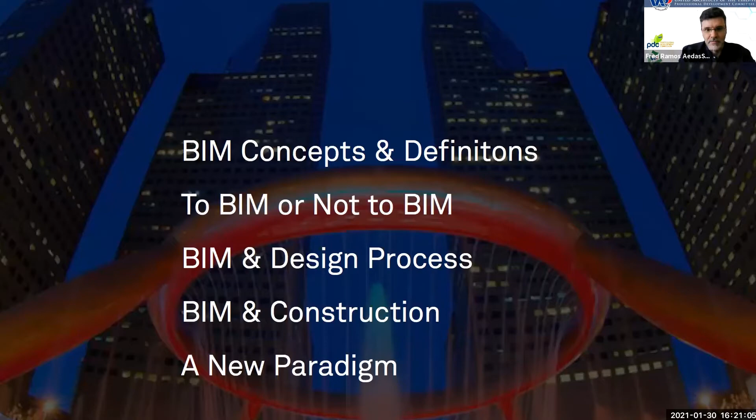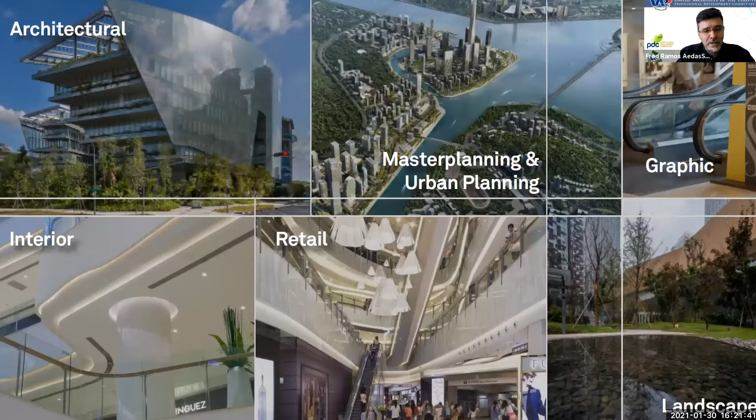Aedas as a company is built on this belief that great designs can only exist if you truly understand deeply the social and cultural background of the community that you're designing for. And this is a driving force behind everything that we do. So as you might have seen in our video, we are located in 12 cities. We do architecture, interiors, master planning, retail, graphic design, landscape, mixed use, hospitality, infrastructure, retail, residential, education, adaptive reuse, cultural design, industry and logistics. And there's a little bit of an update from what we had on the video. So we have 590 international design awards from 2014 to 2019.

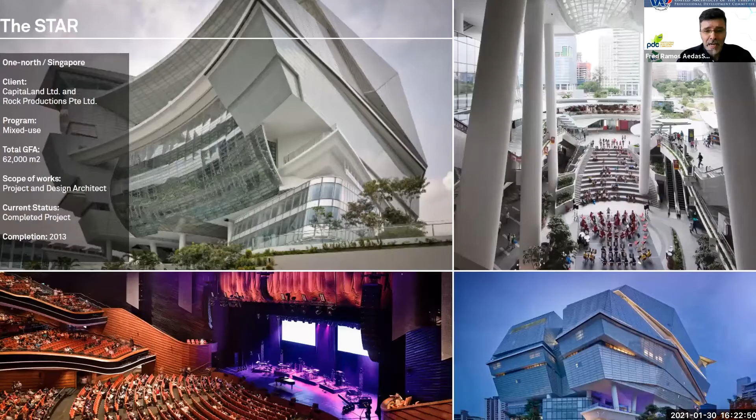And as the committee reminded me very well, we as architects like to see projects and pretty images. So I was asked to talk a little bit about some of the projects that we do. Of course, the West Kowloon high-speed rail terminus in Hong Kong is one of our big iconic designs. In the same way, in Singapore, we have the Marina Bay Sands or the Star Vista, a 5,000-seat theater placed above a naturally ventilated shopping mall, or the Sand Crawler, the Lucas building, where when passing by the street, we could see in some of these windows some of the models that they were using for the Star Wars movies. So they were being developed here.

But it's also about conservation. And when we are in a rapid development environment, such as in Southeast Asia, like in Singapore, we always need to look also at the value of our built heritage.

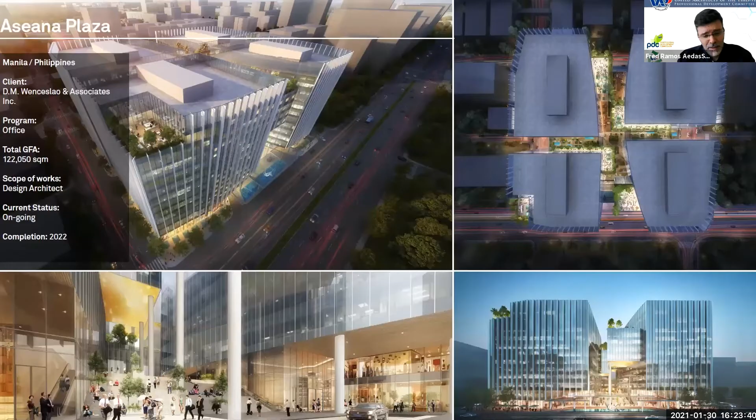And this is a work that we are very proud of: the renovation of the Raffles Hotel in Singapore, one of the most iconic hotels in Singapore. And as an office based in Singapore, which I'm part of, we operate in all of Southeast Asia, and we reach as far as projects in Japan, Philippines, Australia, and the Middle East towards the West, passing by India, of course.

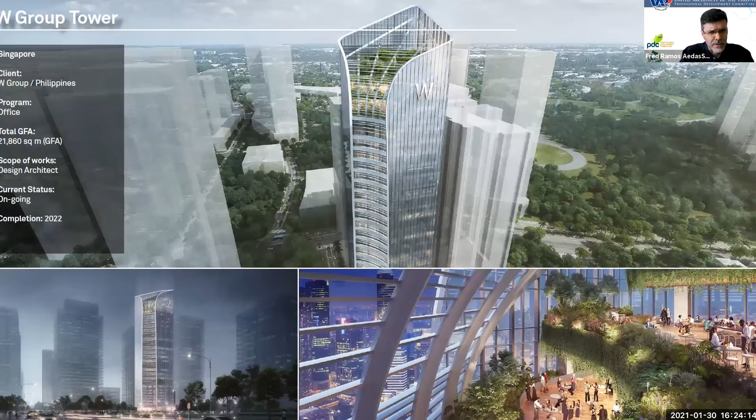And of course, we do have some projects in the Philippines. There's some of the work that we have done there: the Aseana Plaza, the W Group Tower, the Parkwall mixed-use development, the One Ayala Avenue.

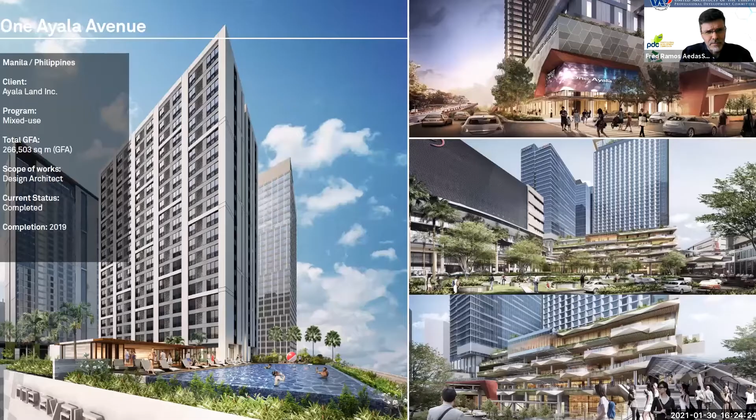And a little bit about myself. So I have done several talks: Budapest, Tokyo, Osaka, several in Singapore, several in Europe also, and I have some awards, as was mentioned very politely in my introduction. But not only do I talk often about digitalization, I also do some talks in healthcare, and now we actually combine digitalization and healthcare to develop new solutions that are designed and adapted to the needs of the communities that we're designing for.

So when starting to reflect about how, in the 1 hour that I was asked to talk, I can bring this idea of what is BIM to you all, I would like to try something. Before we start, can I ask the participants to use the chat and just respond yes if you consider yourselves BIM experts.

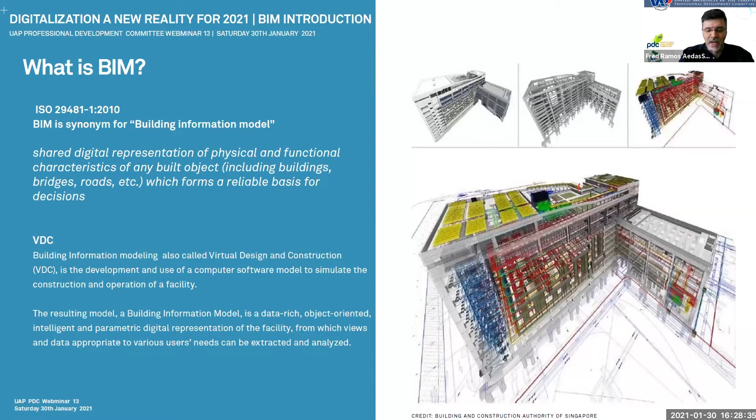Also during your construction process, as Jojo was saying, in their survey they found that some projects could have 15% abortive works related costs, and BIM can definitely assist with a lot of this. I personally think it's an interesting topic to consider the cost aspects and benefits of BIM, because a lot of times the industry just assumes, okay, if BIM is faster, I can finish design faster, and I just move quicker to other aspects of it.

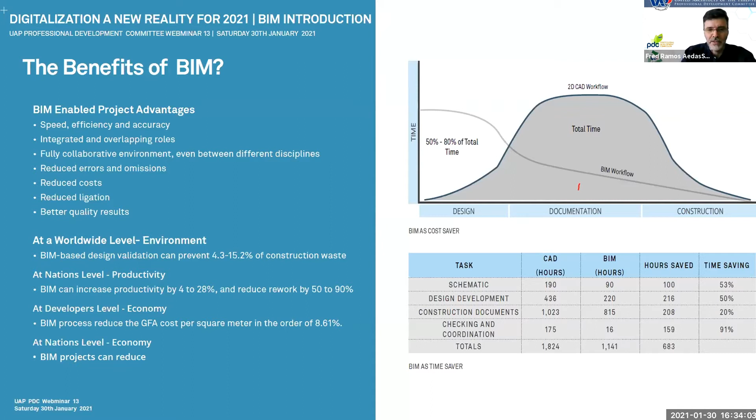Okay, so one of the other aspects—for those of you who are already experts and for those just being introduced to BIM—you will probably have heard about this idea of BIM dimensions. And what is this idea of BIM dimensions?

For us architects, the 3D dimension is relatively easy. We know 3D is 3D geometry, and BIM 3D basically means we migrate from doing work in 2D, either by CAD or drafting by hand—for those of you old enough, like me, with white hairs, to have tried the grueling process of designing by hand—to constructing and designing our buildings in 3D.

But there's more beyond that. There's this idea of 4D, which signifies adding time to the model and using the model to see how the construction evolves through time, and also cost. Then there's 6D sustainability, 7D facility management, and 8D related to safety.

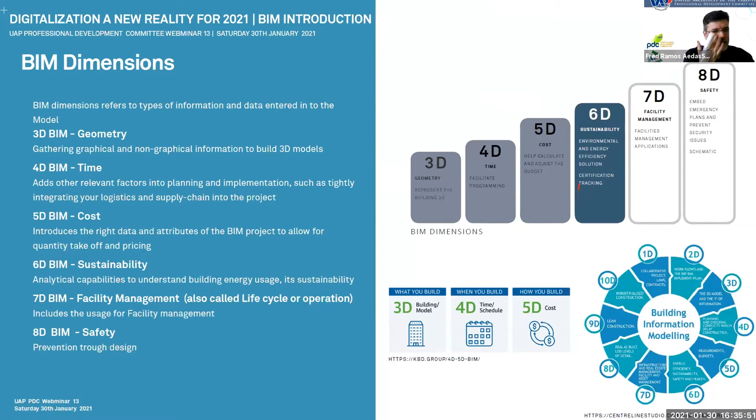Although this isn't entirely standardized—different authors will call it differently—it's very well established up to the 6D. After 6D it starts to get a little messier, and there are even authors who talk about 10D, the ten dimensions of BIM. But for our purposes, we'll focus on 3D, 4D, 5D—which are very widely accepted—6D sustainability, facility management, and BIM for safety.

BIM maturity level is another aspect used to understand the level of comprehension and maturity of your BIM process.

Traditionally or historically, we had the so-called BIM levels developed by the UK, the British standards 1192 and PAS 1192. For those of you that work in BIM, you probably have heard about this. It's very commonly used, although in our region, Southeast Asia, not all projects refer to PAS 1192. A lot of times we use Singapore standards or American standards instead.

This talks about the levels of BIM, where CAD is level 0, so we are not using BIM at all. Level 1 is using a mix between 2D and 3D, still using some CAD, trying to introduce some 3D elements, but not yet fully coordinated among all the teams.

Then you go to level 2 BIM. This is what the UK government had established to be achieved by 2016, but they couldn't achieve that target, so they postponed it to 2021, if I'm not wrong. There's this idea that you work collaboratively, actually sharing information with others - this idea of models and objects collaboration.

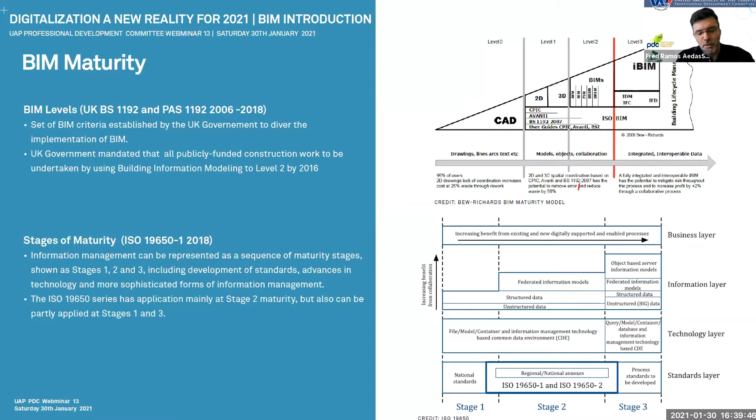One other concept I want to talk about is this idea of BIM for FM, facility management. Many of us in the industry now say this is the latest trend. I personally believe it's not so much the latest trend - it has been around for some years. But there's this idea that we have cloud integration of real-time data from Internet of Things sensors, and you can integrate all this data in a common data environment to actually inform decisions and monitor and improve the operation of your buildings.

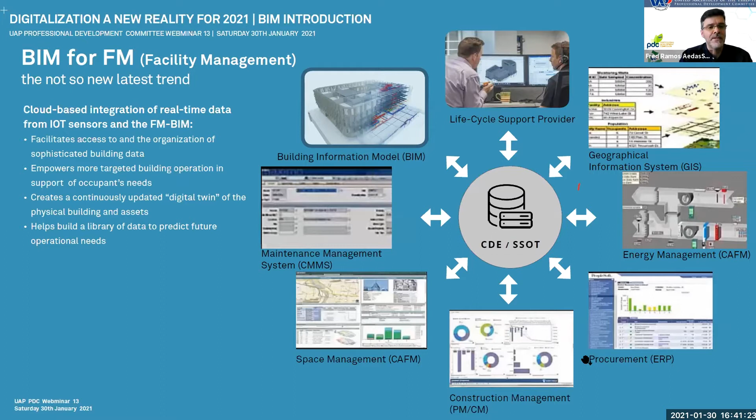Imagine you can use your energy management system from the building, compare it with your BIM information model, and identify potential areas where the building is not performing as expected, or establish effective preventive maintenance schedules. Because you can see, okay, my pump is losing some performance - probably compared to the building information model related to its operation time, it's already getting to the end of its life cycle. So I can do a maintenance replacement now to increase efficiency, instead of waiting until it actually breaks, which has huge impacts on the operation itself. So why do I think this idea of BIM for FM is not the latest trend at all?

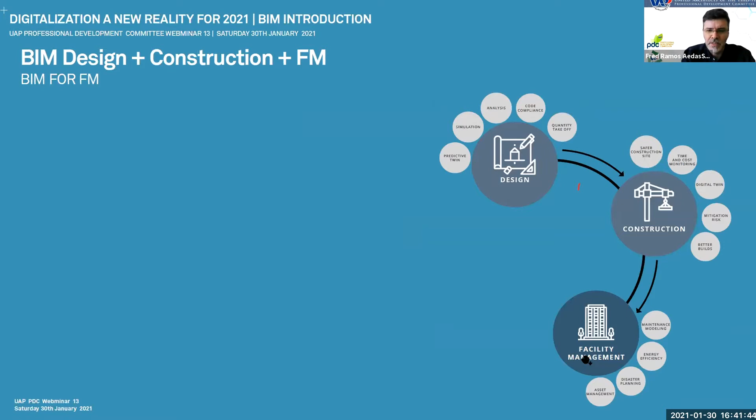This was also touched on by Jojo in his presentation. Yes, we started using BIM for designing, BIM for construction, we introduced BIM for facility management, but there is more than that. The idea of using BIM for refurbishment, or even for a controlled demolition or decommissioning of a building, and then collecting all that data for future developments and pre-design stages, leads to this idea of the full cycle BIM.

That is an idea we first used in 2013 in a BCA BIM competition, so over 7 years ago. The UK Soft Landings Initiative also talks about this idea of monitoring the life cycle, or monitoring the designs through implementation to the live operation of the building.

So it's not so much a new thing, although it is an important thing, and it's coming up much more in terms of RFPs requesting you to respond to this need of BIM for facility management. I personally think you can always benefit the client if you look from the whole life cycle, and not only for facility management.

The digital twin workflow is another idea that is very commonly heard about. So what is this idea of the digital twin? Imagine that you have built your BIM model, that is an exact replica of what you have as a built asset. So your building is replicated in a digital realm. You can use it as a predictive twin.

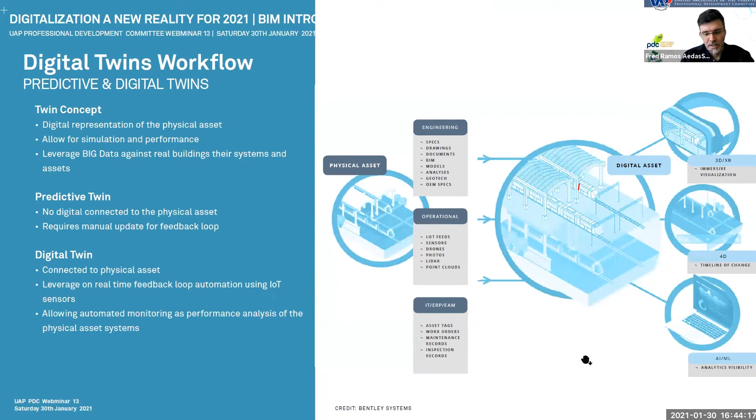As we move to the level of digital twin, you start to use the idea of Internet of Things sensors that link data to automate the collection of data directly from your built asset into your digital twin model, allowing you to compare without needing to manually feed data into your digital twin model.

Augmented reality, virtual reality, and mixed reality. Jojo showed us some interesting ideas you are experimenting with. There are three levels. It's important to understand that virtual reality is the one we are more familiar with, and it comprehends a truly immersive experience where you basically have no contact with reality. We are just completely in the digital environment.

When you go for augmented reality, it's slightly different. This is where you augment reality by using digital elements to further expand it, okay?

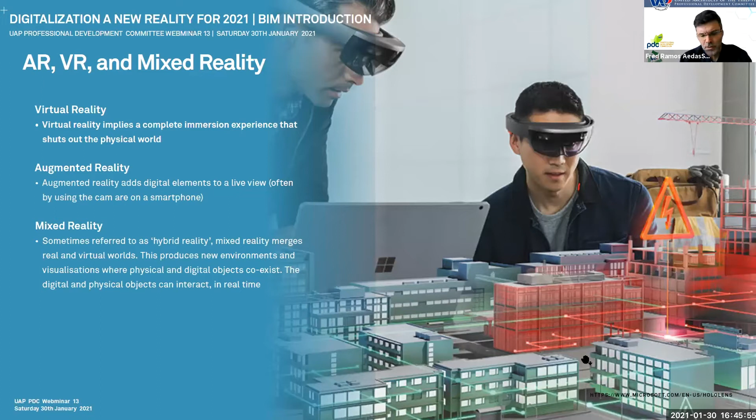And then there is one that mixes both, and it's quite interesting, because at the same time, as in this image, you are using things like Microsoft HoloLens 2 that allows you to see the digital world you are constructing, but still look and see through to your augmented reality world that you have on top of the table. So you will actually be able to meet persons on the other side of the table, and on top of the table you can have a holographic experience. It's an interesting mixing of both technologies.

So to BIM or not to BIM, I believe that's no longer the question. In the way that we are, and as the industry has evolved, there is no future without BIM. Some of you might think BIM is a new thing — I have some bad news for you. BIM is not new. BIM has been around for 30 years or more. And if anything, BIM is the present, but BIM is becoming very quickly the past.

If you just look at conventional BIM as it is, you will no longer be competitive in the next 5 to 10 years if that's your goal. Because when you're looking at BIM, it goes much further beyond just building models. It's about the optimization of your processes, it's about leveraging for construction, and all of that goes beyond the conventional 3D BIM, even if you look at BIM introducing also data.

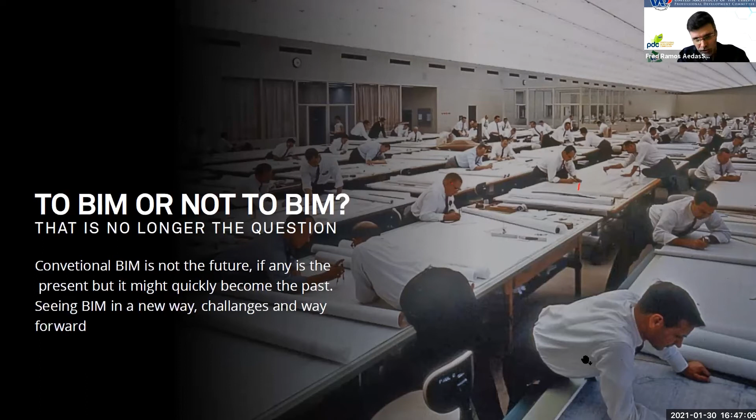One of the common discussions I often see about BIM is: when do we start to use BIM? A lot of us at the beginning adopted a quite interesting strategy, similar to how we used to do 3D visualization — we do design, then pass the completed design to another department, and that department will develop the BIM model. It's not even a BIM process, it's just the BIM model.

In recent years, we have seen a very positive understanding from the industry that this is not hard cut. Design and BIM are just two faces of the same coin, and they need to be completely integrated to leverage all the advantages of BIM as a process. But in reality, this seamless integration is not even a fade in, fade out — we are moving to something I like to call a constellation of data.

Focus on data. We will evolve data through the process and through all stages of the process, augmenting data, and you will be touching this data with whatever tool you have at hand that is more convenient, more expedite, and more efficient to complete your task.

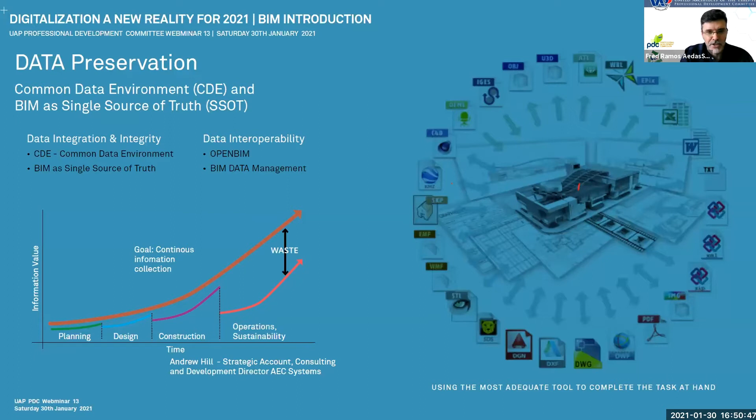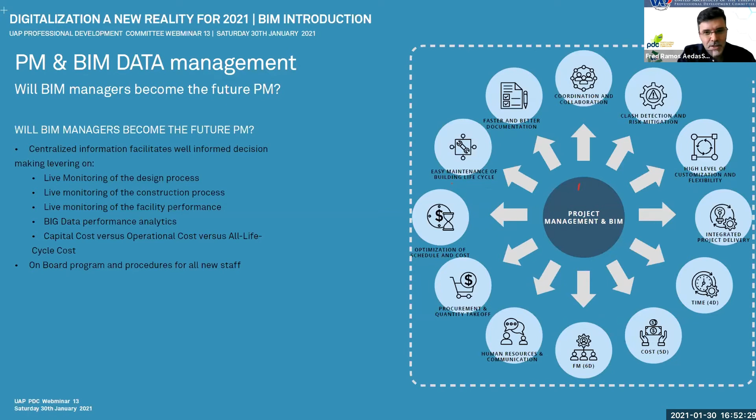So as I mentioned before, standards robustness is going to be fundamental to ensure that we as an industry can collaborate seamlessly and preserve our data. Sometimes people ask, why is this important? Why is it so important to maintain data? So imagine that you have all your formats, let's say in DWG, when you're using 2D CAD. If suddenly DWG disappears from the industry, all the information that was being stored in DWG will not be able to be read by any computer anymore.

International standards allow you to ensure that your data will be preserved even if one of the industry players disappears or one format disappears. And that's achieved by the buildingSMART Industry Foundation Classes format, the IFC format, that is introduced by ISO 16739. Also, a very common standard that you'll hear about when you talk about facility management is COBie. The Construction Operations Building Information Exchange is a format that you use to collect data related to building operations.

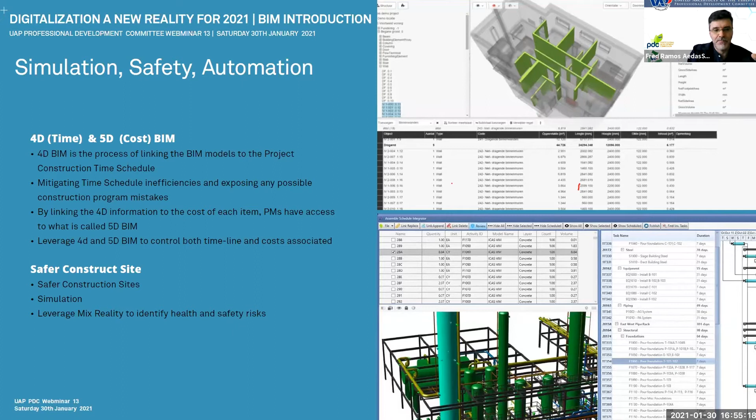You actually are monitoring your building's operation, almost like if you were in airport traffic control. You can check movement, check traffic, check all the operations, and in real time you can make decisions to adjust the performance of your building.

This is extremely important for owners because, to keep it in perspective, your CapEx cost, so your initial investment related to design and construction of a project, is probably only 30% of your total life cost of operation. So when you focus on these 30% and you tend to forget the other 70%, your costs through all the life cycle are going to be exponential.

And that's why being able to optimize your building performance in real time using BIM for FM based on digital twins, and with this the new idea of technological buildings, is going to be more and more demanded by building owners, especially the ones that actually keep their assets. So things like hospitals, airports, retail, not so much residential, because a lot of times they are sold to other owners, so the building contractor will not keep its ownership. But when you keep your ownership, this becomes extremely important.

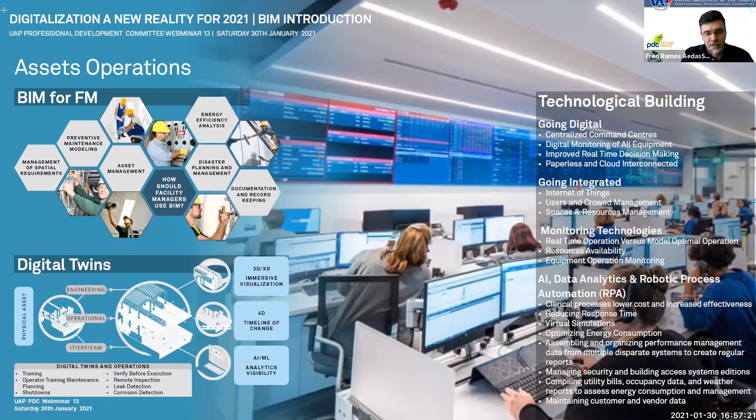And this final idea of integrating BIM, virtual design, construction and operation, and smart cities. So leveraging the twins workflow, you can actually integrate this data, and people are already starting to do this with the smart cities that we have been talking about. And we see a lot in the industry the beginning of this idea of the city information model as a further development from the building information model.

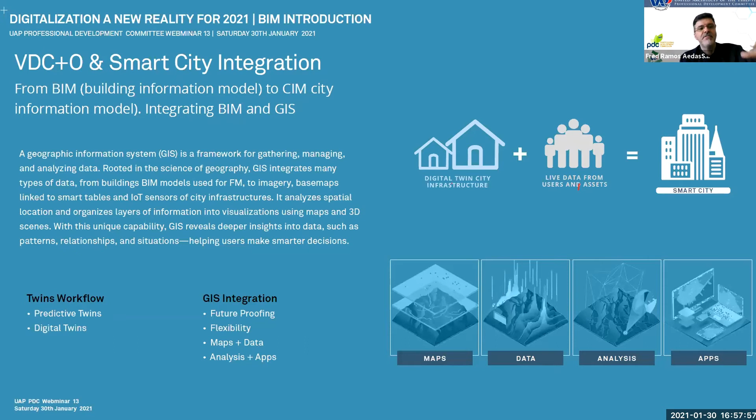Okay, so this brings us to, and our time is not so bad, roughly the middle of my presentation, and we're talking about the BIM impact on the design processes.

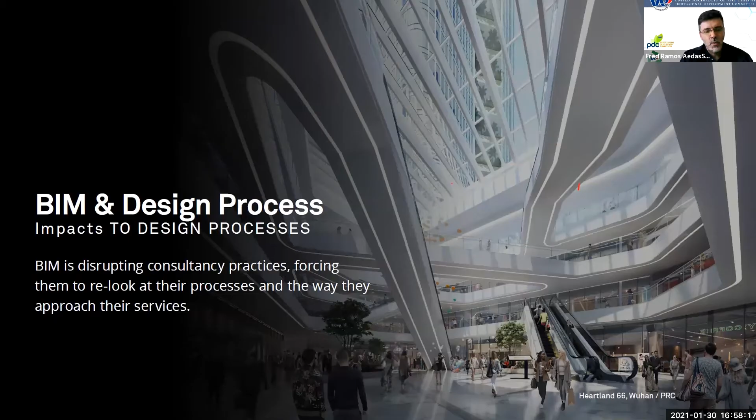We all know that we love to draw, and architects and all the designers have this tradition of understanding the exercise of architecture a lot based on drafting. The reality is that with the implementation of BIM, you are no longer drafting, you model buildings. So you move from drafting to modeling. And this is a fundamental change to the way that we do things.

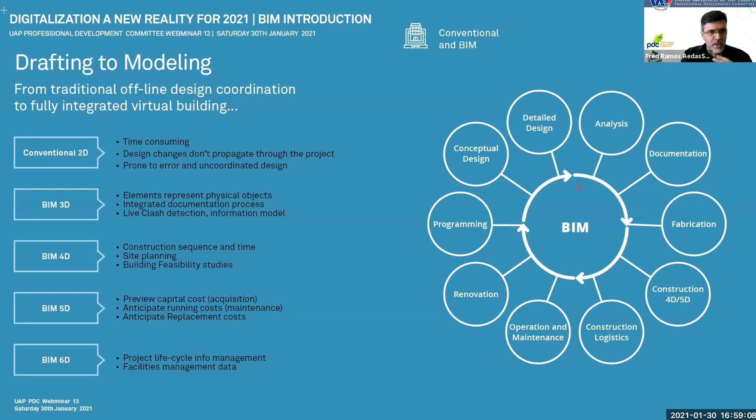We also go from the traditional offline design coordination to a fully integrated virtual building in a virtual, collaborative environment. These two changes are radically impacting the way that we do design, to a point that we are now adopting and seeing more and more of this idea of data-driven design.

Data-driven design can leverage big data because for the first time we have the potential, even in the AEC industry, to leverage all the data that is available. While in the past we would be able to read one book or two books, these days you can actually have, through the internet, access to a huge amount of data. We can have much better informed decisions about how we design.

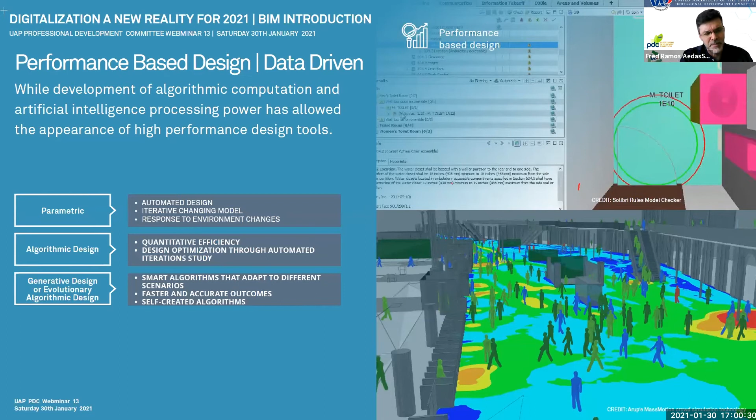Or you can have an open loop prototype where you develop and evaluate automatically, but you still have a feedback that is manual, so you still control that. Or you can even have a closed loop prototyping where all the process is automated and you define the process, but you let it evolve by itself.

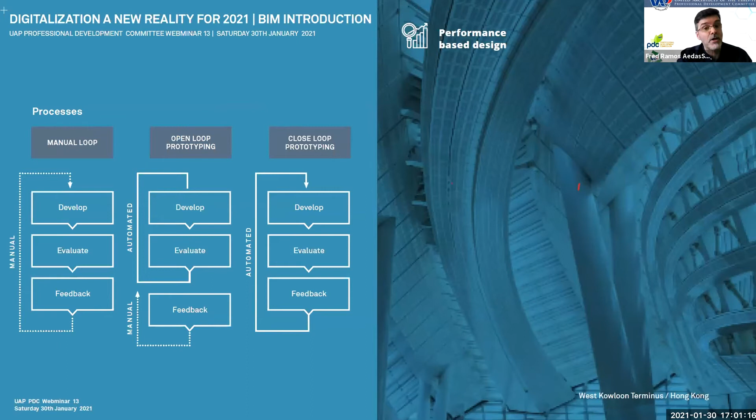This is a little bit of the generative design itself. Traditionally, and this is our colleague Louis Sullivan, he said that form follows function. What we are seeing now is that with the evolution of BIM and the evolution of design, form starts to follow performance.

So when form follows performance, you actually have two ways of doing it. You either adopt a what-if design strategy, and this is parametric design. So if I make this change, what happens? Or you can have an if-what design strategy. And the if-what design strategy is actually design optioneering, and this is more the generative design, where we actually say, okay, what do I require to do to obtain such performance from my design?

And what they were able to do using generative design was create a bracket that was 40% lighter and 20% stronger, more resistant, while using 50% less material. So imagine if we could actually achieve the same level of increase of performance in architecture by using our generative design tools.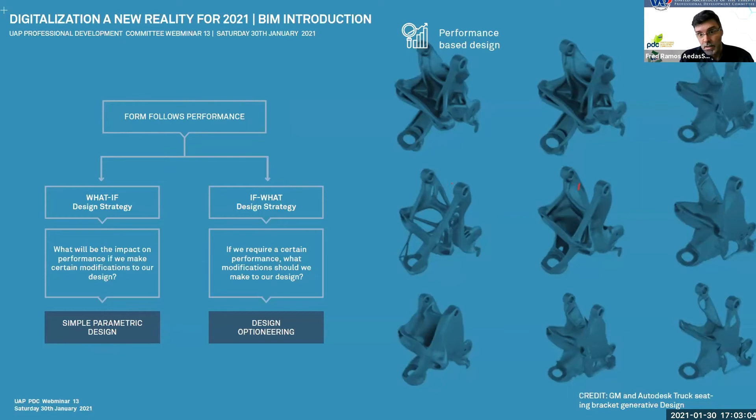Of course, you're going to say, but when we do this generative design, Fred, how does this work actually? Your results are only as good as the data that you put in. And computers are not biased. But if you tell them to do something, they will do it regardless of whether it is possible or not.

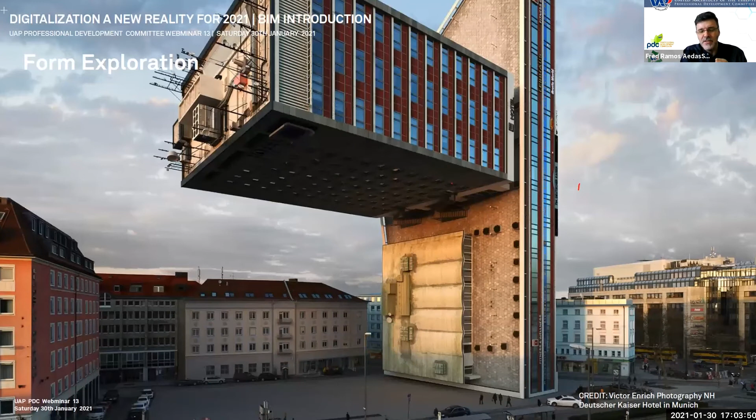And this is an example from Victor Enrich that I particularly love, to make us understand where data can fail us. If you just process, and because it's digital data, you can do everything you want. You can twist a building, you can turn it upside down, in and out. It doesn't really matter. It can be whatever.

You can even float, because in the digital world there are no limitations for what you can do with data, because it's just data at the end of the day. So if it is just data, you can even disassemble all the data. This is where human intervention and knowledge will guide the use of data.

And now I move to this idea of BIM and construction, and how BIM is actually used even in the conventional on-site construction that we have today. BIM can also be used to generate this idea of design for manufacturing and assembly. It's another idea that you probably will hear a lot. And it is this idea that when you design, you use the digital data in your model to automatically allow you to manufacture and assemble, not necessarily needing to go for construction.

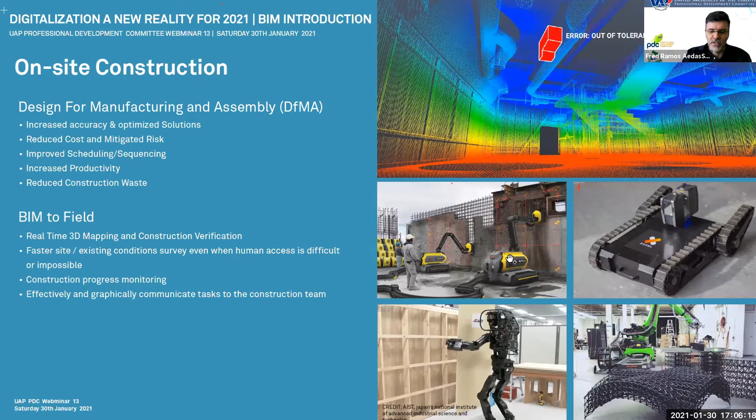There are other images also, like using robotics for construction, either more human-related robotics or more conventional robotics. But there is also this idea of going offsite. And we are all familiar with offsite prefabrication. Prefabrication can save us 45% on construction time, can increase quality by 15%, and it can also reduce your construction cost by up to 30%.

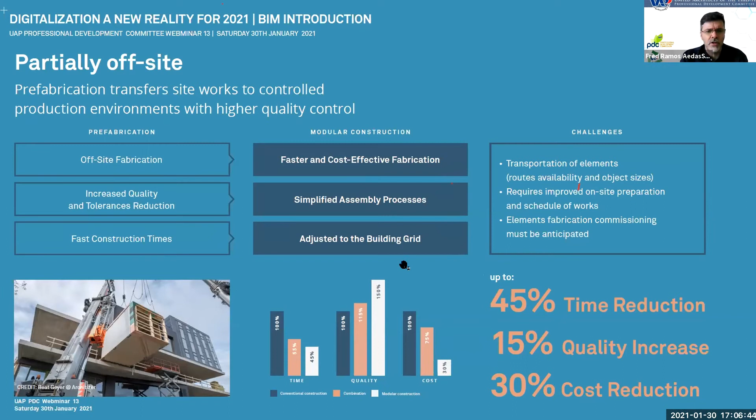Even moving a little bit more, there is this idea of the prefabricated, pre-finished volumetric construction that basically transforms construction into assembly using design for manufacturing and assembly, allowing you to reduce up to 60% of the time that you spend on site, and to improve your quality and rigor of construction by up to 50% compared to a conventional system.

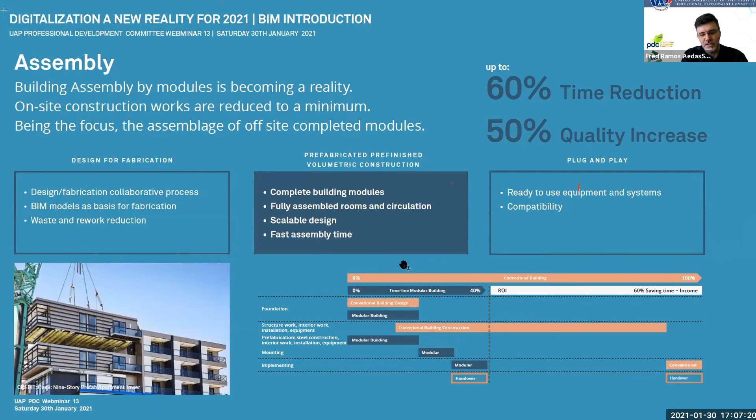The latest technology that we have been seeing a lot in construction is actually this idea of going to 3D printing. This image that you have on top is one image during the construction of what is today the largest printed building in the world, in Dubai. And it's interesting because Dubai is targeting that by 2030, 25% of their new buildings will be 3D printed. So they have been driving this idea of 3D printing buildings.

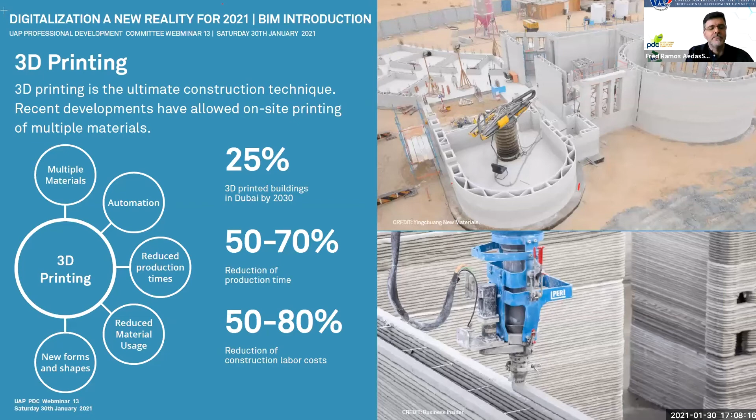With 3D printing buildings, we aim to achieve 50 to 70% reduction in time and potentially 50 to 80% reduction in costs related to construction labor. So in conclusion, because of all of this, I believe that we might now be facing a new paradigm.

So what if this combination of performance-based design, data-driven, as we mentioned before, with design for fabrication, with use and empowerment, is actually leading us to a new paradigm? A new paradigm where we will need a new type of architect, a mix between the funky architect that we have always been and these geek coders. As Jojo was mentioning in his presentation, we will need to be able to code also, okay? It's going much beyond the traditional tasks that we did as architects.

It's going to create a new process where, instead of designing the buildings the way that you used to, we will use generative design to not design the building, but create the system that is going to design the building. We will still control the design, but we will be assisted by this new system in what I like to call a human-computer co-authorship. We will have new roles where we will need to adjust to new skills and knowledge for these new requirements.